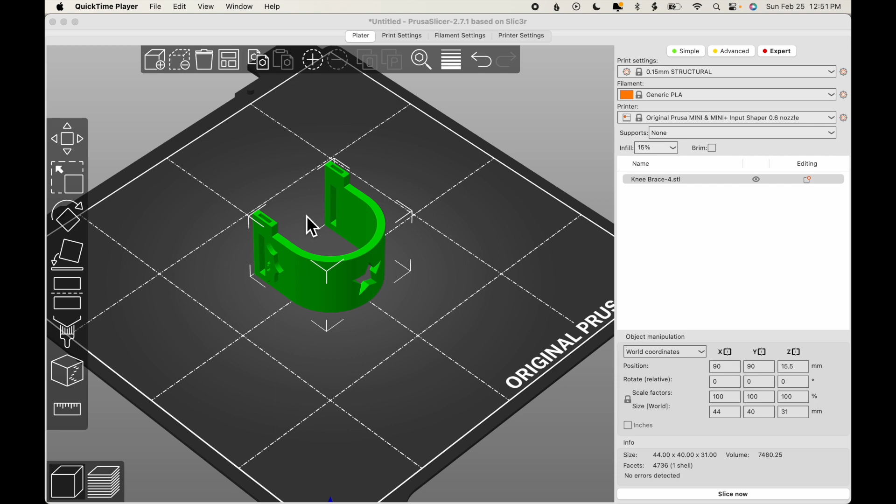If this brace is too large, you might think of scaling it down, but if you do that, it is likely not to work because these sections of the model are already so small that if they're made even smaller, they likely will not print properly. And also, if you scale down the hinges proportionally, those also will become so small that they are likely not to work. So what we'll need to do is to create an alternative knee brace. And to do that, we'll use Tinkercad.

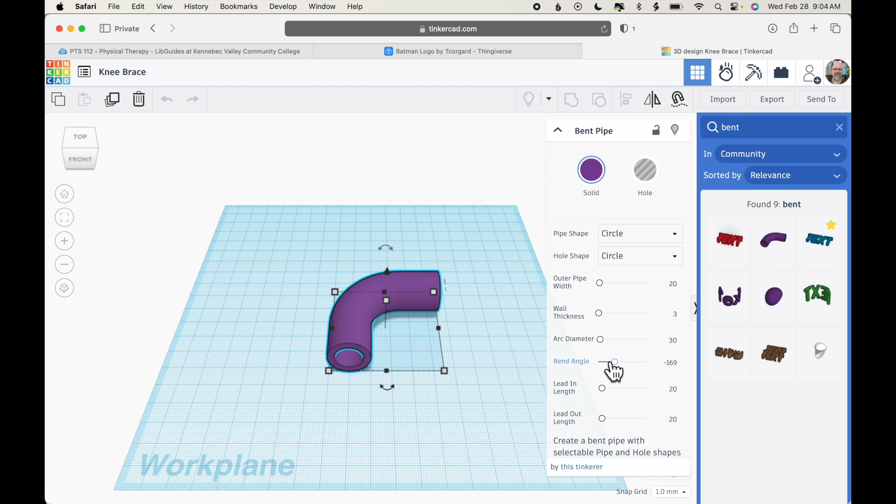In Tinkercad, we'll start a new design and rename it. Then on the right-hand side, click the magnifying glass icon and search for the keyword bent. And what we want is this bent pipe. So we'll click and drag that out to the work plane. We don't want this bend to be 90 degrees, so we can change the bend angle by using the slider on the side. Let's say about 17, which puts just a slight bend in there.

The wall thickness, this is going to be a small piece, so 3 might be a little thick. So we'll click in there and change that to 2 and hit return on the keyboard. So we know that the wall is 2 millimeters thick on the right-hand side and on the left-hand side, and the outer pipe width is 20. So the inner hole is 20 minus 4, 16. Now if our doll knee is 16 millimeters in diameter, then we're all set.

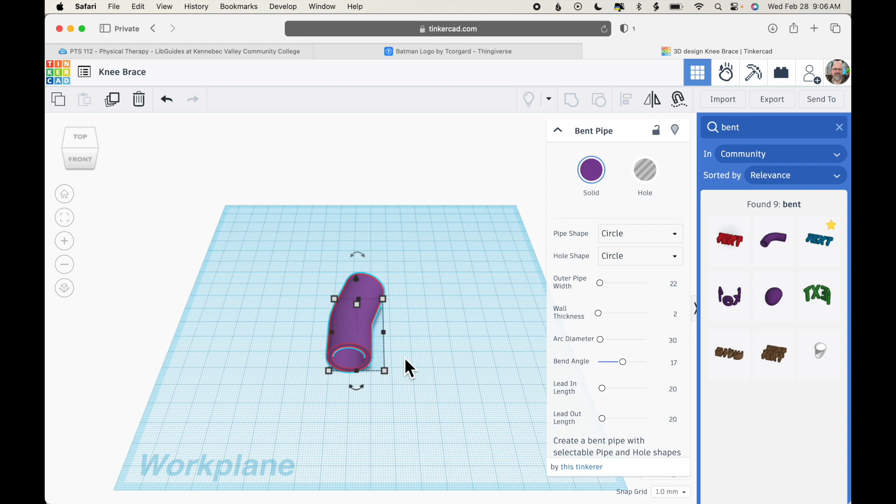But let's say it's 18 millimeters. So we'll click there and we'll change 20 to 18 plus 4, 22, return. Sometimes it takes a few minutes for the change to appear in the model. We'll look at it from the top. Let's say I want to shorten the length a little bit. So the lead-in length is 20. I'll make that 15. And also the lead out length, I'll change to 15.

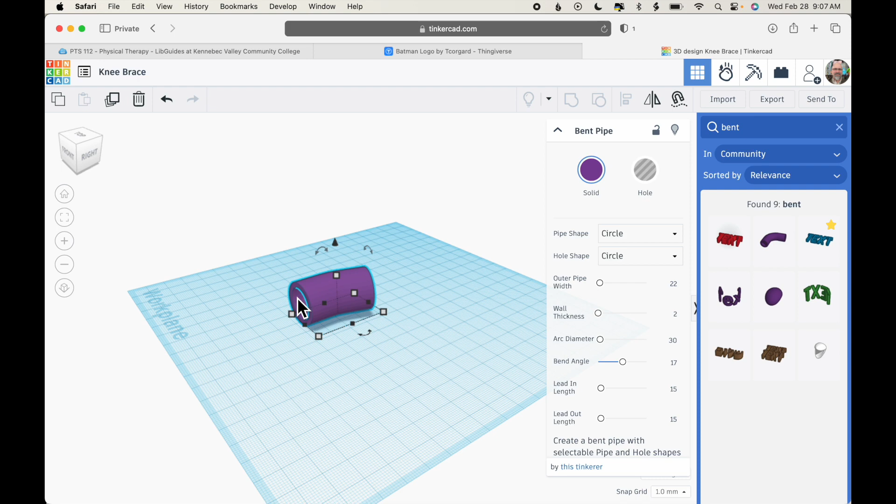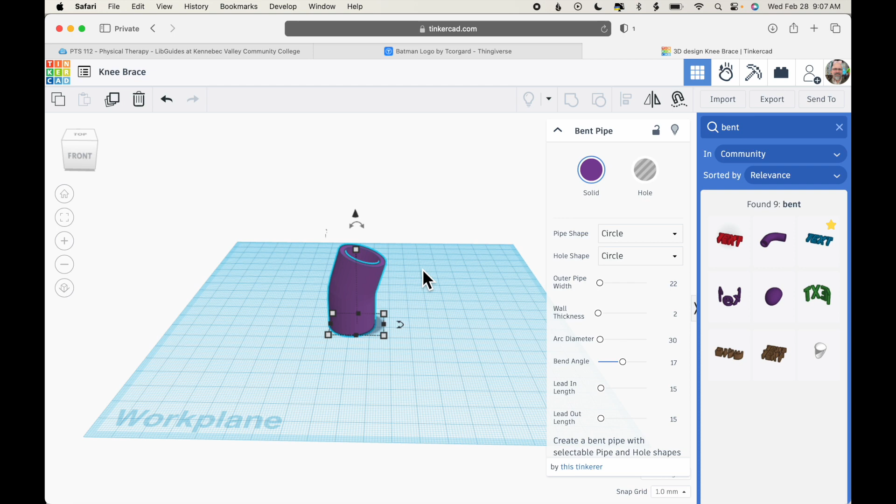I'll stand the model up. I don't want to print it in this orientation, right? Because then I would need supports all throughout the middle, and those would be difficult to remove. So I'll rotate this upright and then tap the D key on the keyboard to drop it to the work plane. That looks good. Now, in this orientation, even though there's a slight overhang, I would not need supports because this angle is much less than 45 degrees, so I'm safe not to have supports here.

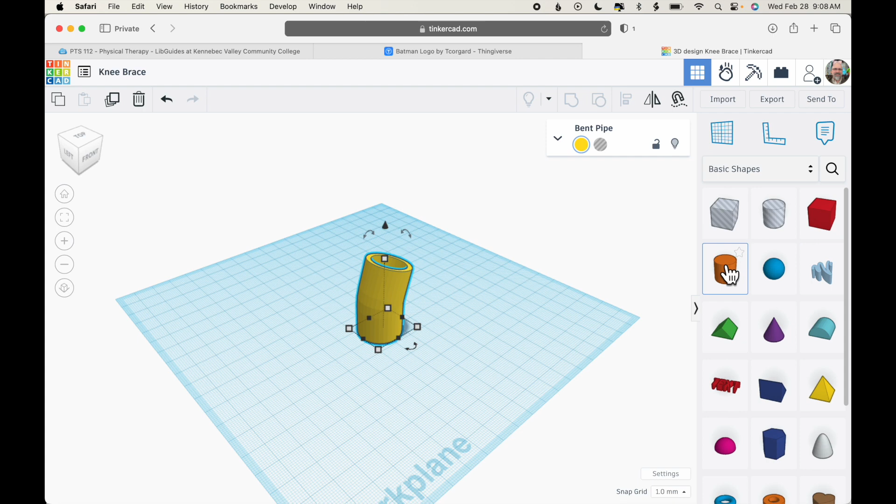So I could export this and print it as is, but I'd like to make a hole in the front so that kneecap is able to breathe. The first thing I'm going to do, though, is change the color to something that's more visible. That dark purple is hard to see. Okay. So on the right-hand side, I'll choose a cylinder, drag it out, and I'm going to smooth the sides. You can see the sides of the cylinder are kind of rough, so I'm going to move the slider all the way to the right to make it more smooth.

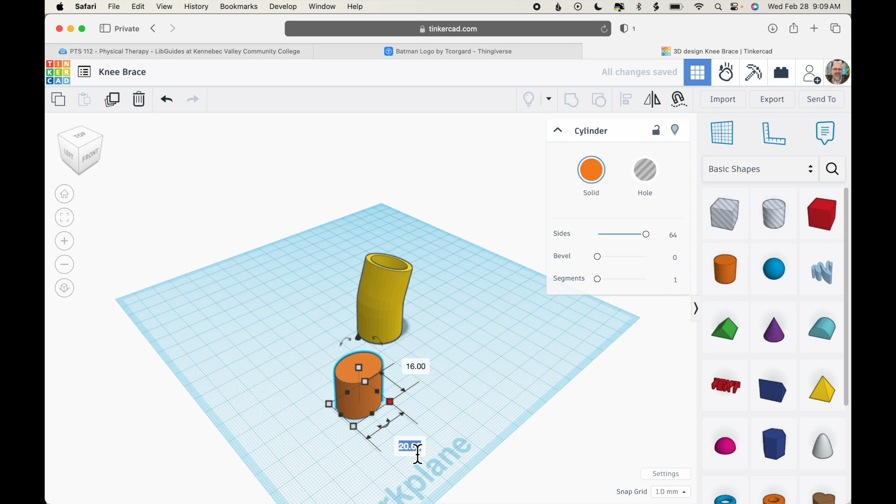I know the interior of this bent pipe is 18 millimeters, so I want the diameter of this to be less because I don't want it to be digging into the sides. You'll see what I mean in a minute, so I'm going to go ahead and make that 16. I'm going to rotate the cylinder 90 degrees, lift it up, move it roughly in position. Okay. Select both pieces, choose align, and align side to side and up and down.

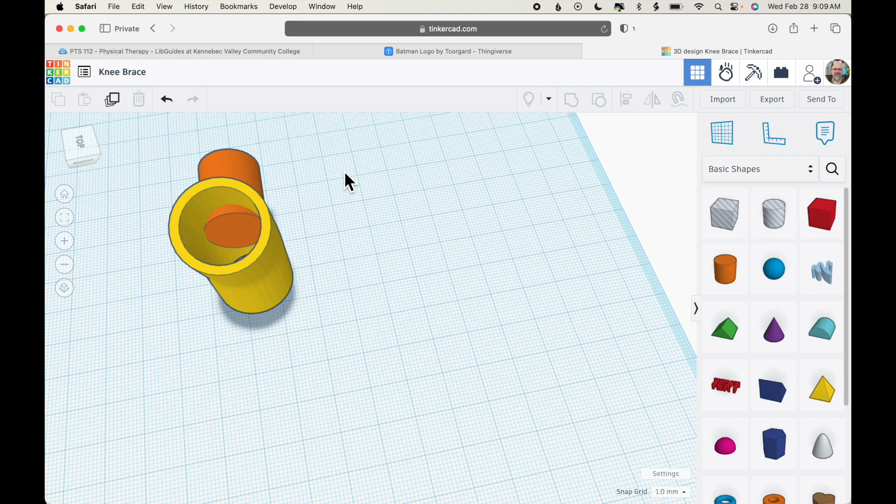Check on the interior. That's not all the way through, so I'm going to click off both pieces, click on just the orange cylinder, and using my arrow key, I'm going to just move it back so that it's gone all the way through cleanly. Now with the orange shape still selected, I will turn it into a hole by clicking hole, click off both shapes, select both of them, and group.

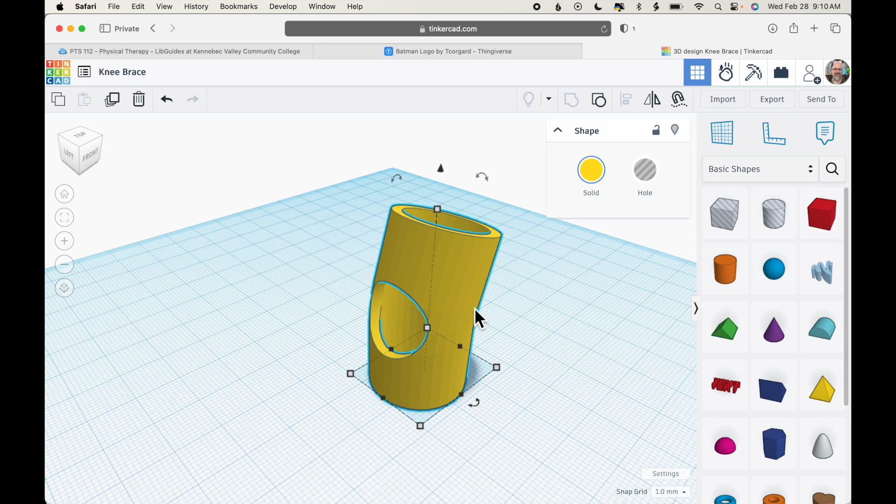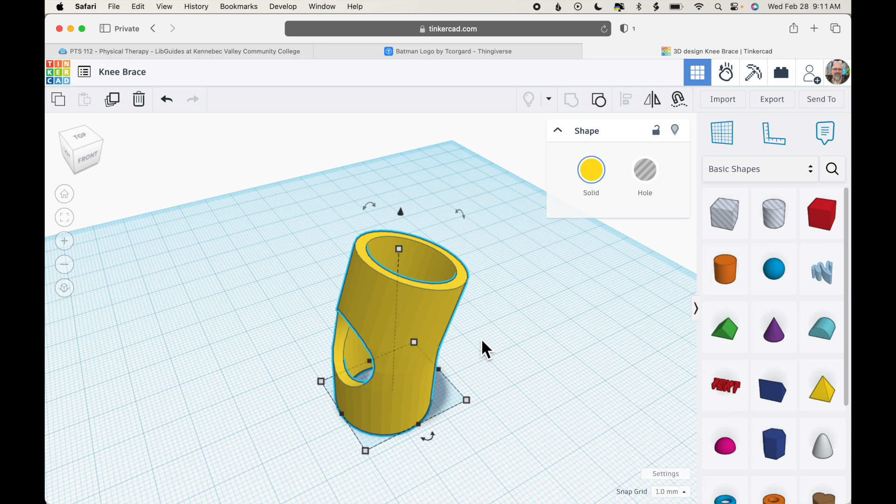There. I could add further decoration to this piece, but for the sake of demonstration, I'm going to call this good. Just realize, though, now when you slice this to get the model ready for printing, you will need to add supports because the top of that circle will need to be supported. But that's fine. Those supports will break away, and you'll end up with a nice, clean model. The last step then would be to click Export, export as STL, and then bring the model into your slicer, slice the model, and print.